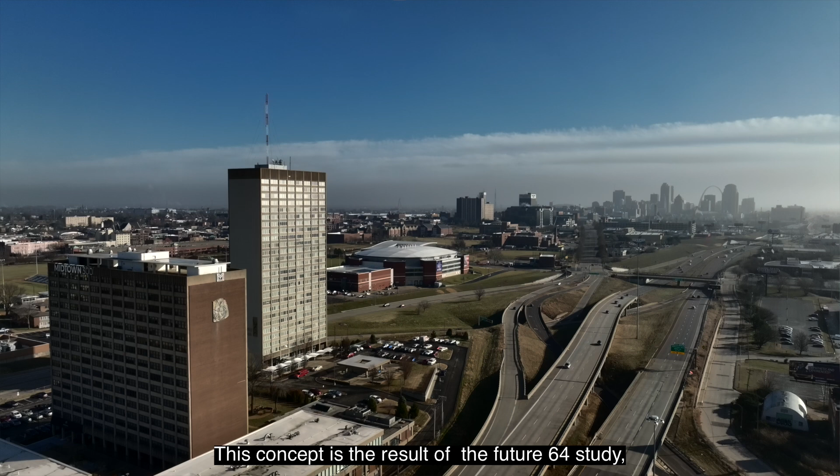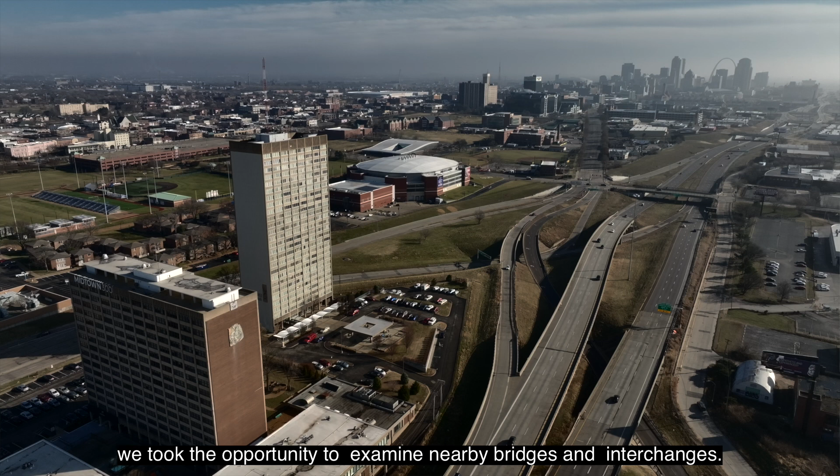This concept is the result of the Future 64 study, conducted to address the needs of this dynamic and evolving area. MoDOT has substantial bridge work planned for this segment, and we took the opportunity to examine nearby bridges and interchanges. Our goal is to ensure these structures are optimized to meet the demands of modern travel, enhancing safety, connectivity, and accessibility for all users.

Our community engagement for this project has been an integral part of the process, and we've consistently incorporated public feedback. A common theme we've heard through in-person meetings, surveys, and online engagement is that the current corridor needs to be more accessible and safer for bikers, pedestrians, and drivers. We've worked closely with our community partners to develop the recommended concept, which we will be reviewing here together.

This is the list of needs and goals that we came up with from listening to the public. We talked with our partners in the community, residents, and travelers through this corridor, and we found out what the community needed and wanted from a project like this.

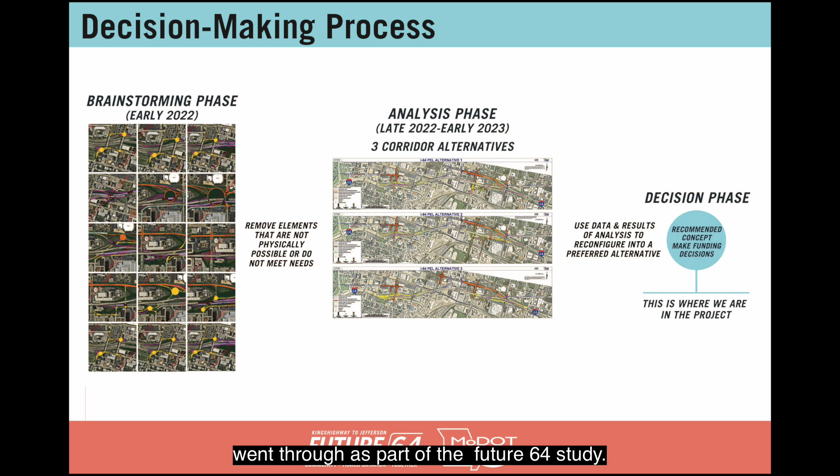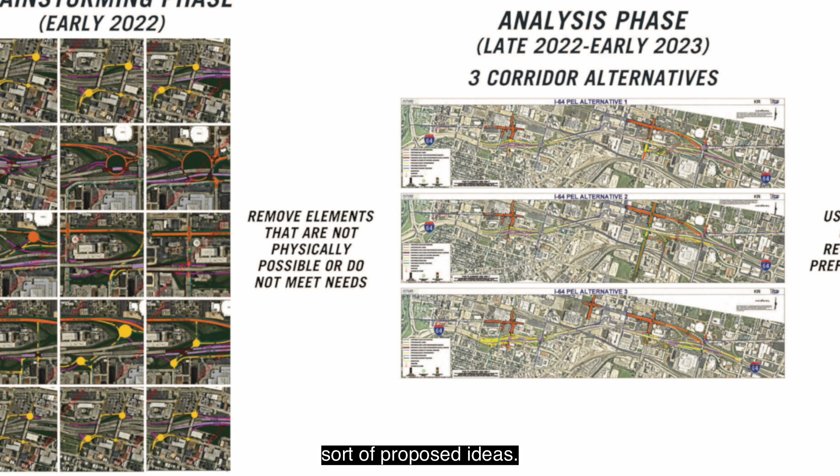This slide shows the decision-making process that we went through as part of the Future 64 study. We started by brainstorming what all the changes could be in the corridor, and then we were able to whittle it down using those needs and goals of the community and line it up into three proposed ideas, and it's those three ideas that we ran through a full analysis on.

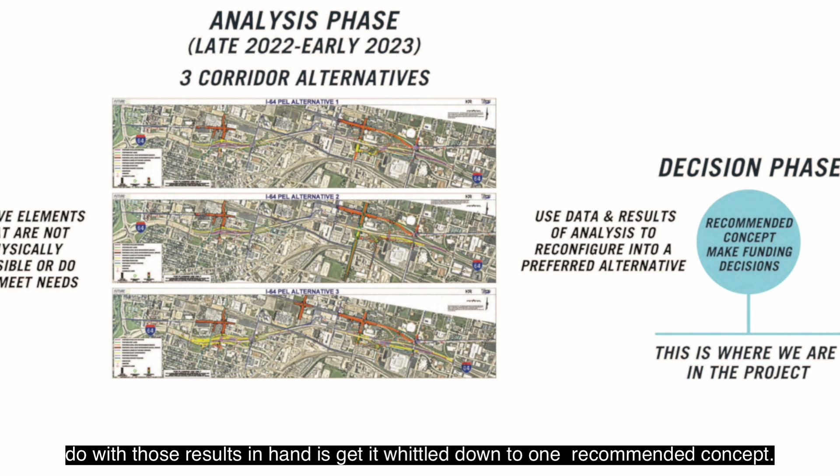We got those results, and then what we were able to do with those results in hand is get it whittled down to one recommended concept. So that's the phase we're on right now. We have that one concept, we've got a full analysis of that concept in hand, and we're presenting it back to the public.

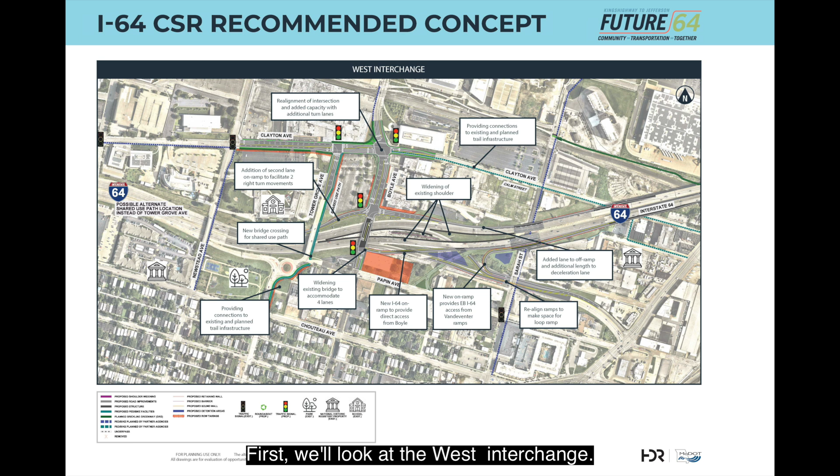This is when we get to start taking a closer look at what the actual recommended changes are in this corridor. First, we'll look at the west interchange. This is near Boyle and Tower Grove ramps. Also, Vandeventer ramps are in this image. I'm just going to highlight some of the biggest changes here, and you can look on this slide for more details.

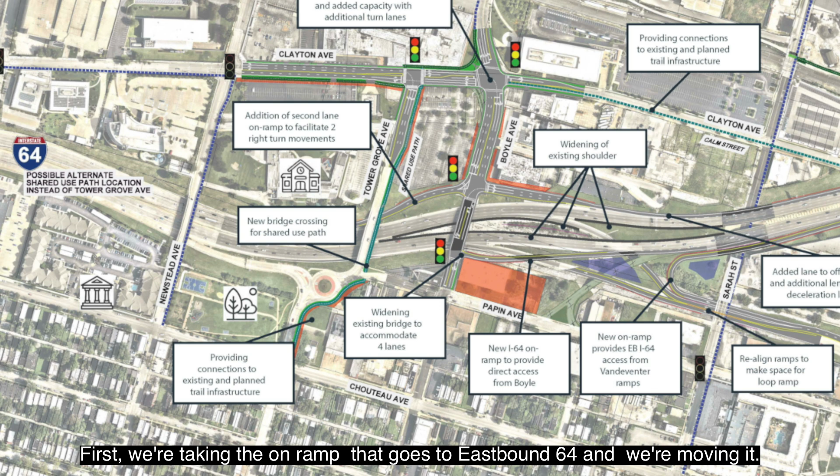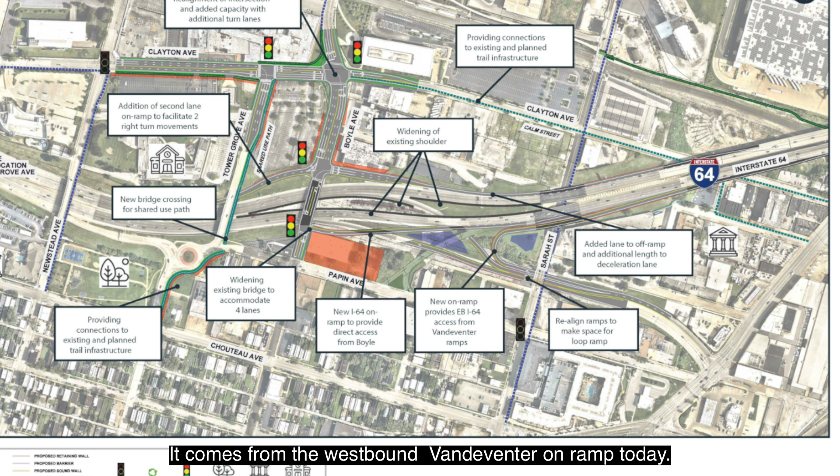First, we're taking the on-ramp that goes to eastbound 64 and we're moving it. Right now it comes from Papin Avenue. We're going to move that over to Boyle Avenue. Also, we're adding a new eastbound on-ramp. It comes from the westbound Vandeventer on-ramp today. So now when you take that ramp, you'll either be able to go east or west.

Also, you'll see some additional lanes and turning lanes on the north side of the intersection that serves our westbound exit ramp as well as westbound on-ramp. Just take a look at this slide if you want to see more of the details.

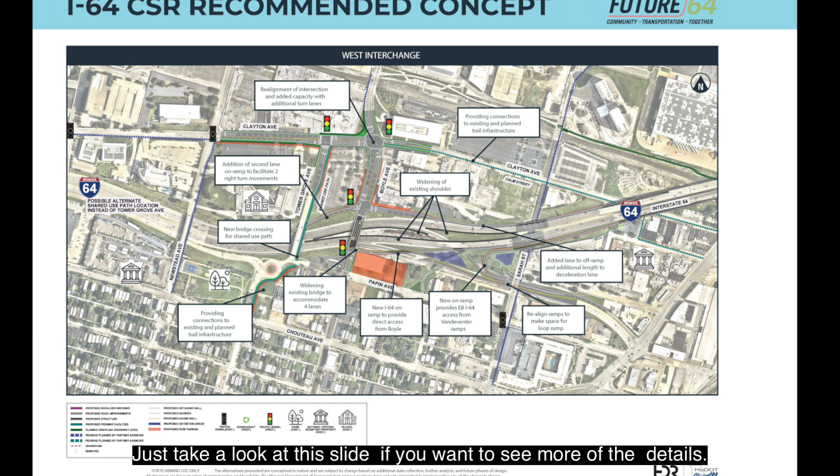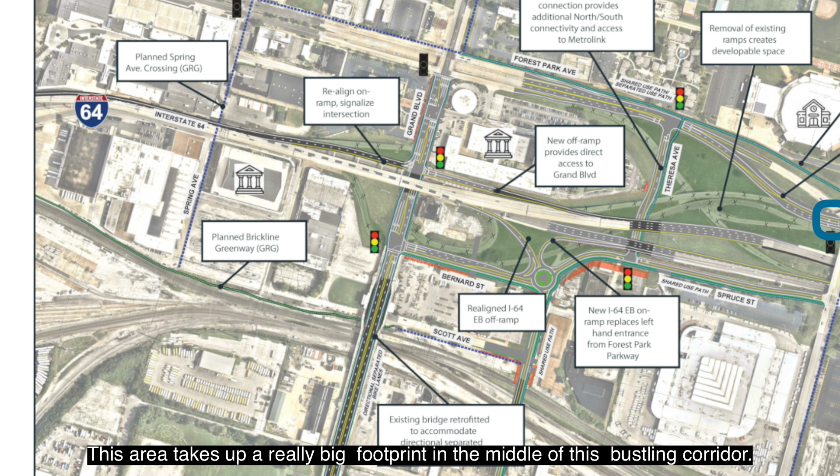In this slide, we get to take a closer look at that east interchange area. This is where our Market Street, Forest Park Avenue, and Grand ramps are all located right now. This area takes up a really big footprint in the middle of this bustling corridor. We think in the future that shouldn't be necessary. The interstate can take up a smaller footprint in this area if we can reconfigure some of these ramps.

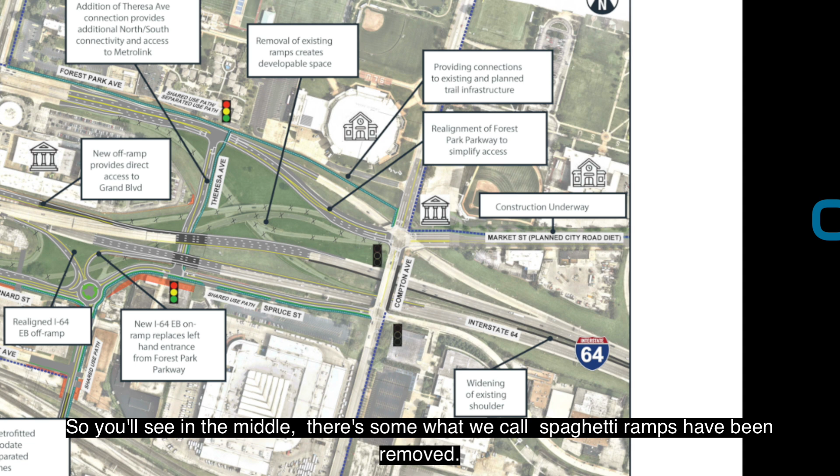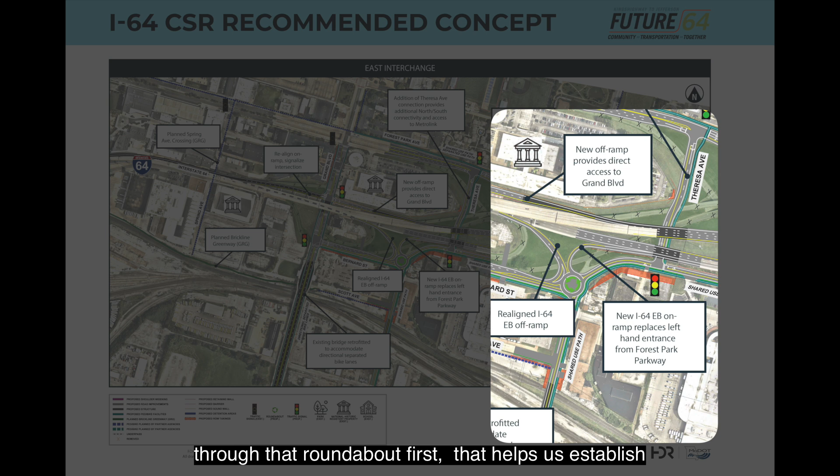So you'll see in the middle, some of what we call spaghetti ramps have been removed. If you look on the south side of the interstate, you'll see a new roundabout there. So the Grand exit ramp, instead of just making a U-turn, passes through that roundabout first. That helps us establish more of an urban grid in this area. And you'll see Theresa Avenue is now a new connection from the north side under the interstate, and it helps get people to that roundabout.

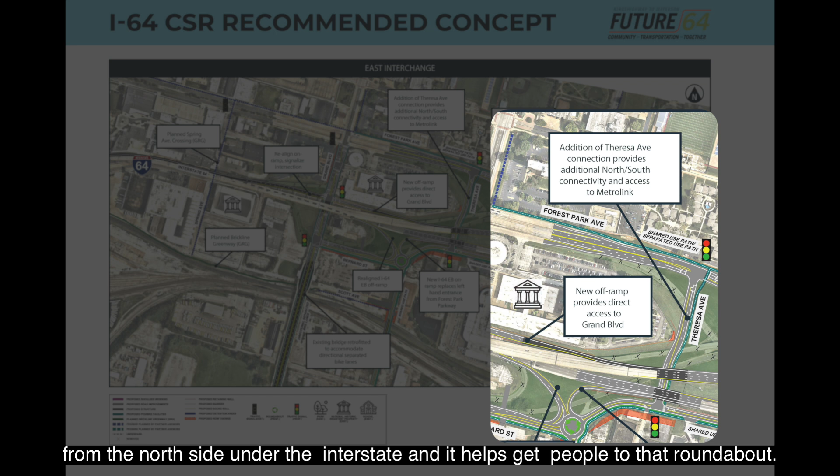That Theresa Avenue connection can also be used to have an on-grade connection right to the Metrolink station. We don't have that currently. To get there right now, you need to use the elevators or stairs at Grand Avenue.

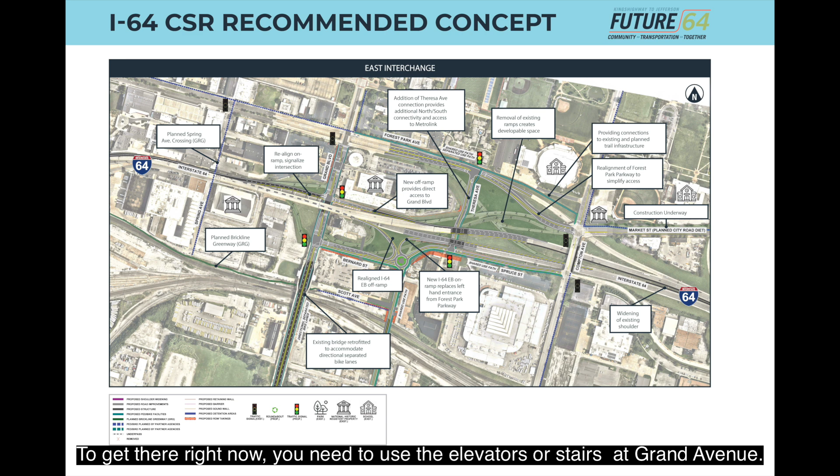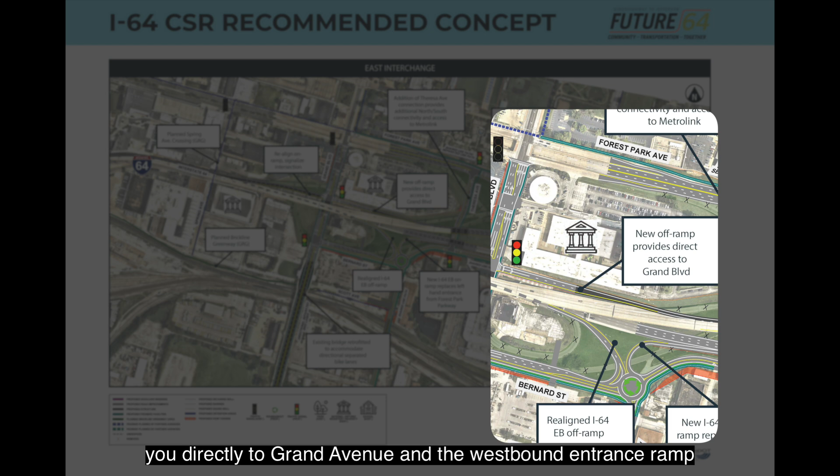You can also see the ramps on the westbound side have been moved. There's a westbound exit ramp now that takes you directly to Grand Avenue, and the westbound entrance ramp from Grand has been realigned so that those two are across from each other. Take a look at this slide for more of the details, but those are the big items you want to look for.

Next, we're going to look at some of the benefits of the changes being proposed in this recommended concept. One of the comments we really heard from all of our stakeholders, the institutions, business owners, residents, and users of the corridor, was they really wanted to see increased safety, not just for people in cars, but also for transit users, bike riders, and walking.

One of the things this recommended concept includes is 1.5 miles of new high-quality bike and pedestrian facilities. You'll see that on those recommended concept layouts, and here are some examples of what those might look like when it comes time to do the projects.

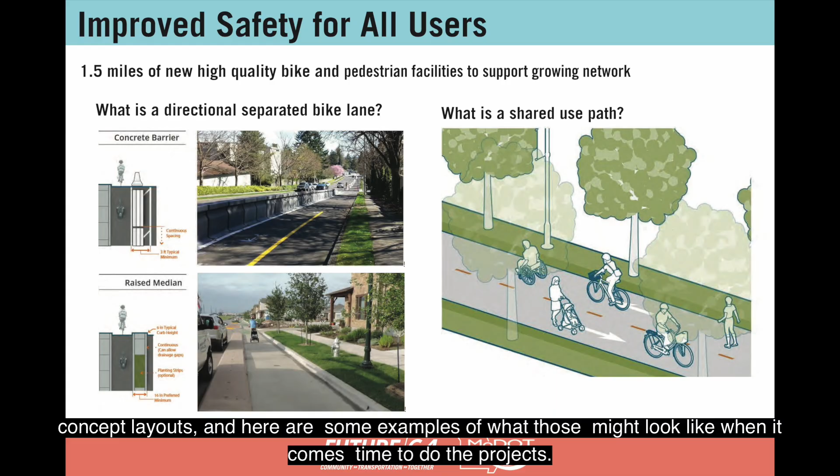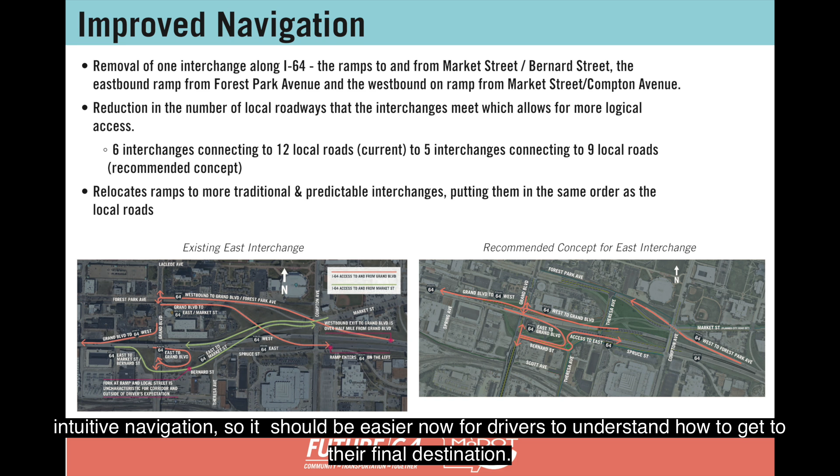One of the project needs for Future 64 was to improve the navigation in this area. The recommended concept relocates some ramps to make for more intuitive navigation, so it should be easier now for drivers to understand how to get to their final destination.

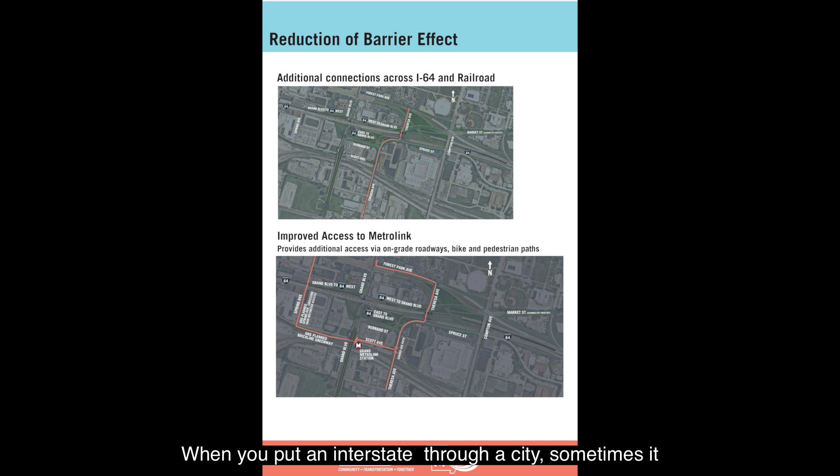The next project need we wanted to address with this recommended concept was reducing the barrier effect. When you put an interstate through a city, sometimes it can create a barrier for community development, paths of travel, or generally neighborhood feel. So one goal in this work was to look for ways to reestablish that city grid, passing either under or over the interstate. You'll see that in a couple places here.

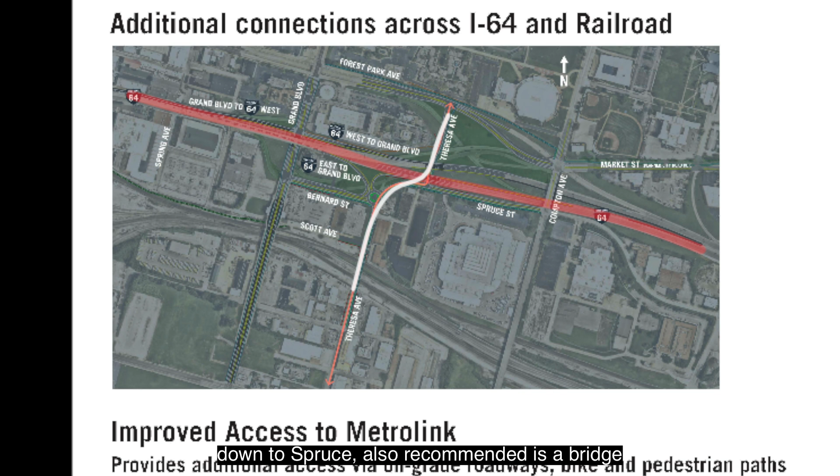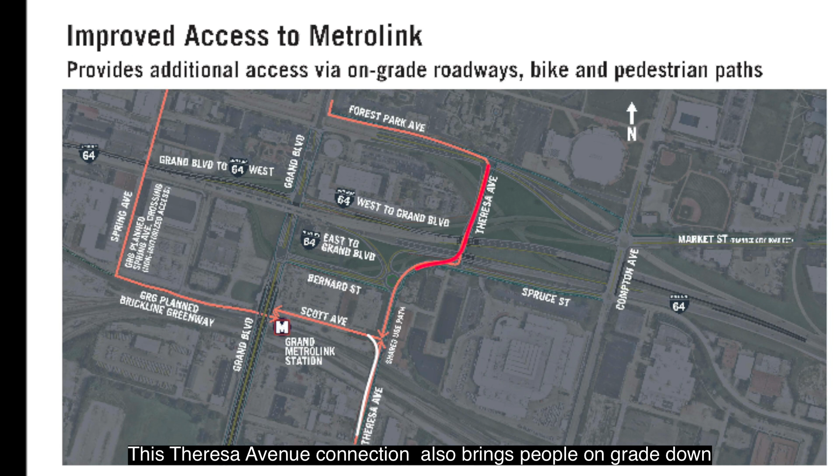The big one is at Theresa Avenue. It connects a new route from Forest Park Avenue down to Spruce. Also recommended is a bridge that continues on Theresa over the railroad tracks to the south. That'll really help establish that community connection, as well as have a non-arterial route that gets you across both of those barriers. This Theresa Avenue connection also brings people on grade down to that Metrolink station, like we mentioned before.

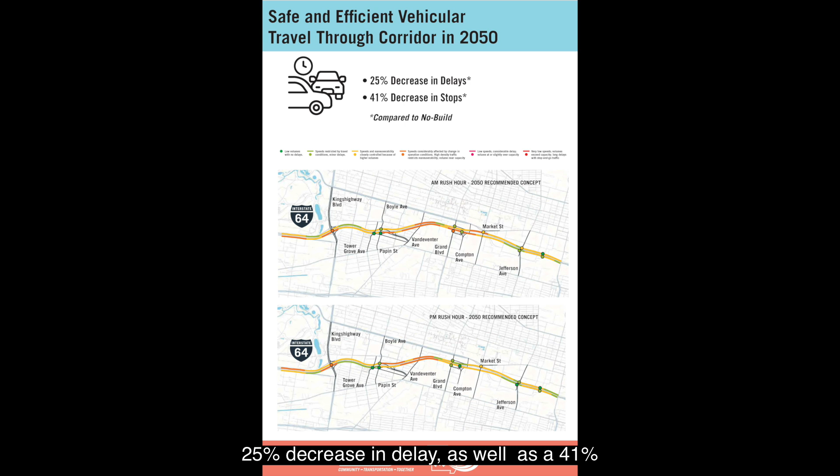Another project need for Future 64 was to look for safe and efficient vehicular travel through the corridor in 2050. This is making sure that I-64 continues to perform well for the vehicles traveling through it. Once we get to 2050, looking at the travel patterns we expect to see then, with the new recommended changes, we would see a 25% decrease in delay, as well as a 41% decrease in stops as you travel the corridor.

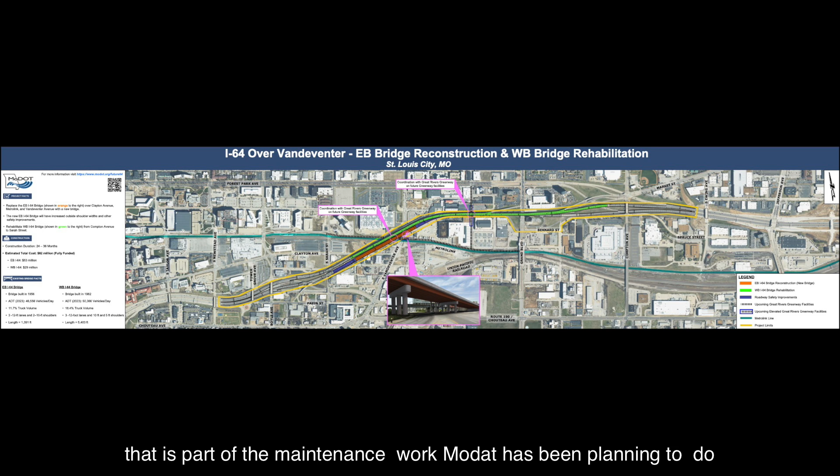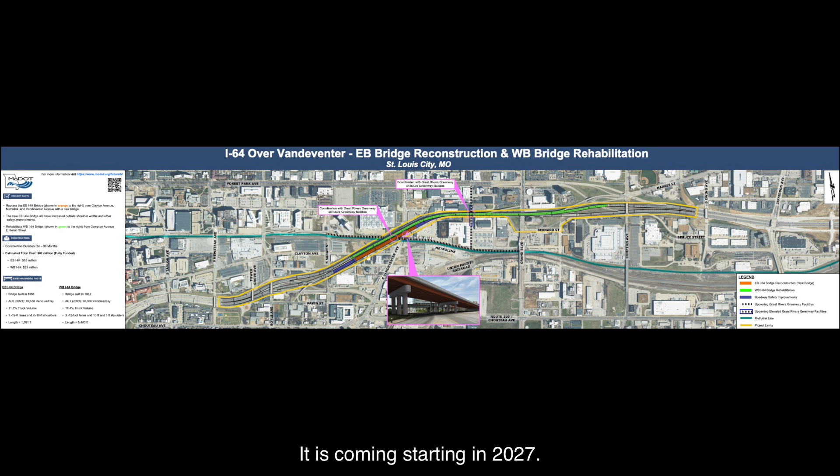On this slide, we are showing the funded project that is part of the maintenance work MoDOT has been planning to do on the I-64 bridges that carry I-64 traffic over Vandeventer. This project is fully funded. It is coming starting in 2027 and is the impetus for why we wanted to look at the rest of the corridor.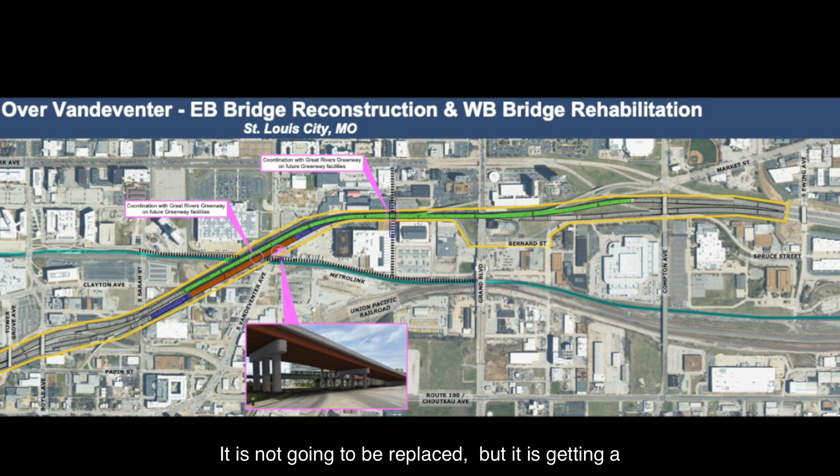If you look in orange, you'll see the bridge that carries eastbound I-64. It is going to be fully replaced, completely removed and replaced with a new bridge. The westbound bridge of I-64 is much longer. It's in green. It is not going to be replaced, but it is getting a major rehab, also starting in 2027.

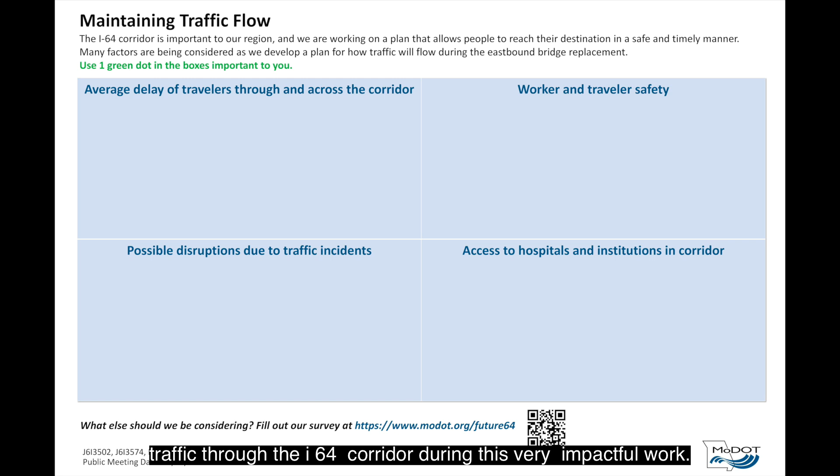You'll also notice in this image that there are two places where we will be coordinating with Great Rivers Greenway because they are constructing crossings across I-64 in our similar time window. Currently on this bridge project, our engineers are looking to decide how to maintain traffic through the I-64 corridor during this very impactful work. Obviously, when you replace a bridge that's carrying I-64 traffic, it's going to have impacts.

Right now, we've got a lot of things to consider as we make these plans, and I want to walk through a few of the things we're currently trying to balance as we come up with these plans. As you're listening to these, think of anything we might not have thought of yet.

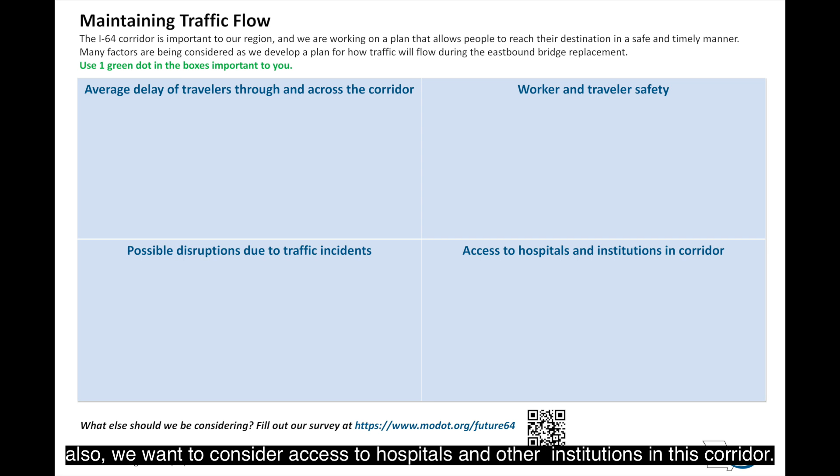We're looking for your input as well at this time. We're considering the average delay of travelers through and across the corridor. Obviously, we want to protect worker and traveler safety during construction. We are considering what possible disruptions due to traffic incidents might do to the traffic. Also, we want to consider access to hospitals and other institutions in this corridor. It's a very active corridor right now.

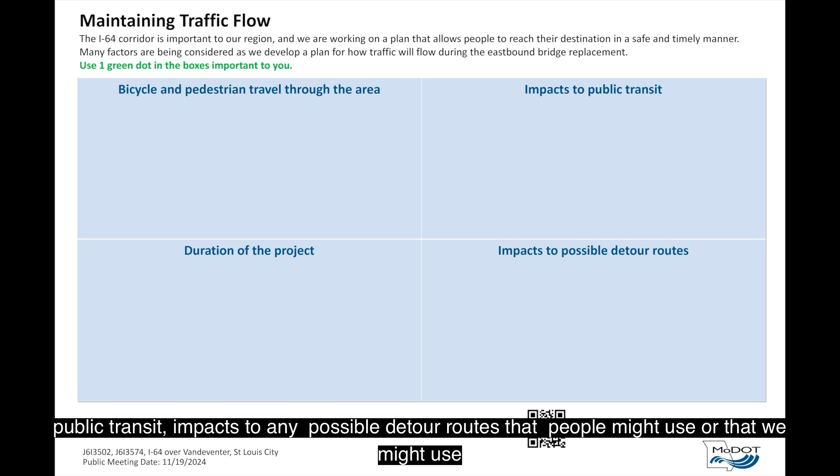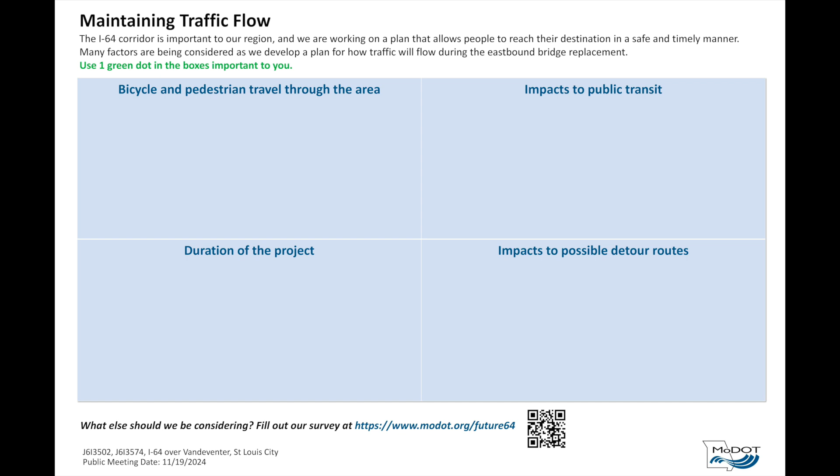We have to look at the impacts to public transit, impacts to any possible detour routes that people might use or that we might use. Bicycle and pedestrians will need to continue traveling through this area during construction, as well as any choices we make and what those might do to the duration of the project. Of course, a shorter term project is always more preferable to a really long project in the area. If there's other things you think we should be considering, please let us know in the survey that's coming up.

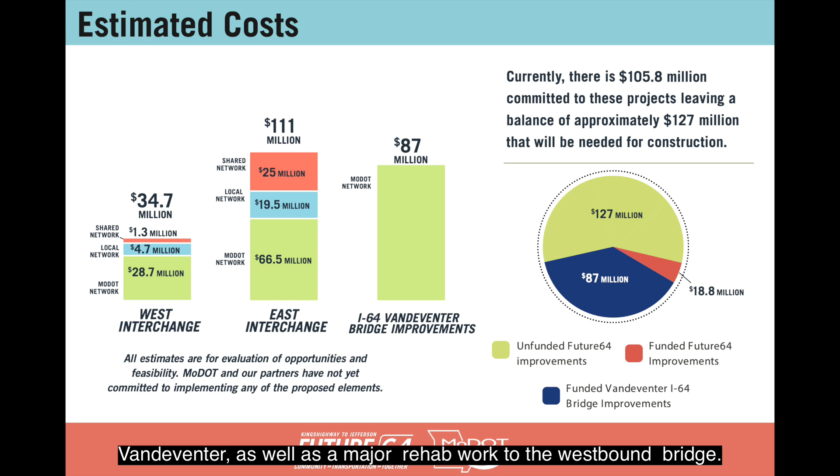So let's talk about what all this will cost. You'll see on this slide in the green bar in the middle of the page there, it shows $87 million. That's the existing investment that MoDOT is bringing to replace that eastbound bridge that carries I-64 over Vandeventer, as well as some major rehab work to the westbound bridge. That is a funded project and it's moving forward. Because we had this large investment in the corridor, that really instigated all this look into what other changes might be best for the future.

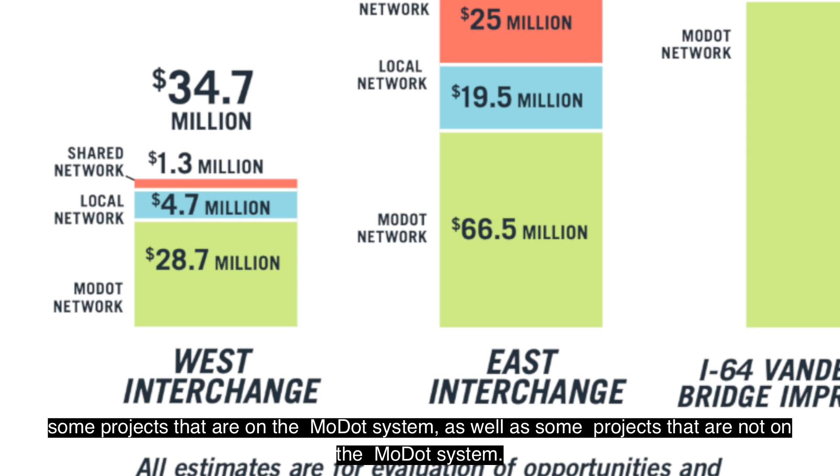Now, the changes recommended now at the West Interchange total $34.7 million. That includes some projects that are on the MoDOT system, as well as some projects that are not on the MoDOT system. We have broken up these costs as best we can into who might be paying for the end product, but it can always change as funding becomes available. Likewise, on the East Interchange, the changes near Grand are much more significant and also include some optional bridges over the railroad tracks, etc. The total cost of all those changes is $111 million, again broken up between the different entities who might end up paying for that at the end.

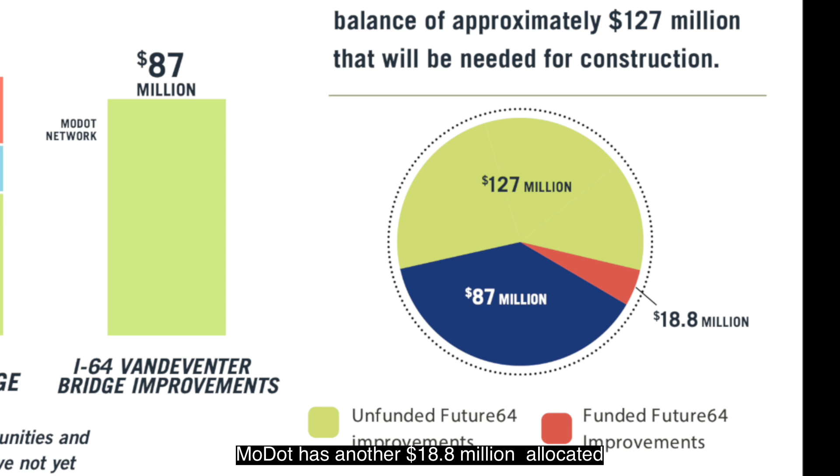So if you look at the circle on the right, you'll see that we do have the blue area, that's the funded bridge work. MoDOT has another $18.8 million allocated to do some of these changes already, and we're working with our partners to look for the other $127 million that might be necessary to finish all of this work.

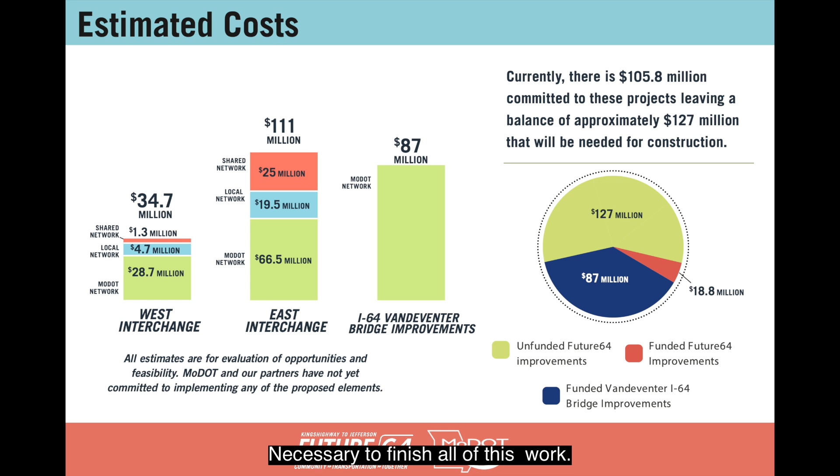Let's talk about the project timeline a little bit. This study started back in 2022. Since then, we've been having a back and forth conversation with the public as we understand their goals and get the different ideas approved or commented on by the public as we go through the process. Currently, today, we have developed one recommended concept for the corridor, and this is our opportunity to present back to the public and get your feedback and comments.

The next phase will be construction. We know that the bridges that carry I-64 over Vandeventer, both are going to have that work starting in 2027. The construction on these different elements in the recommended concept have not been fully funded yet. We've got conversations ongoing with our governmental agency and institutional partners right now, and as those elements get funded, we'll be able to roll those out to the public.